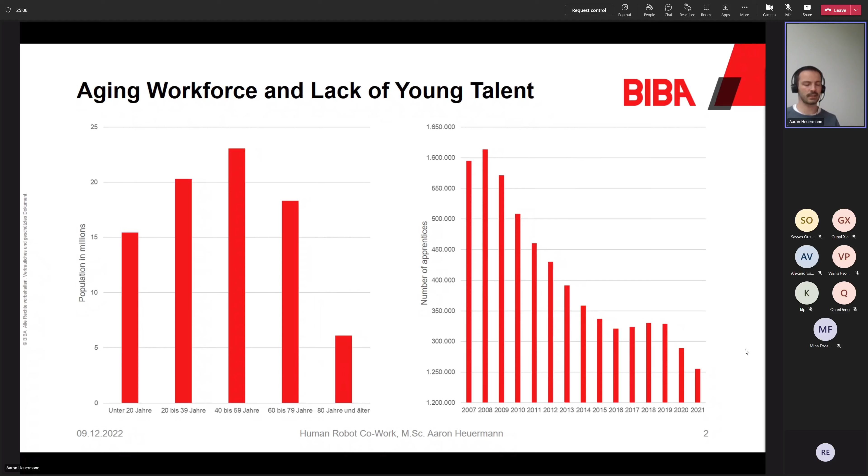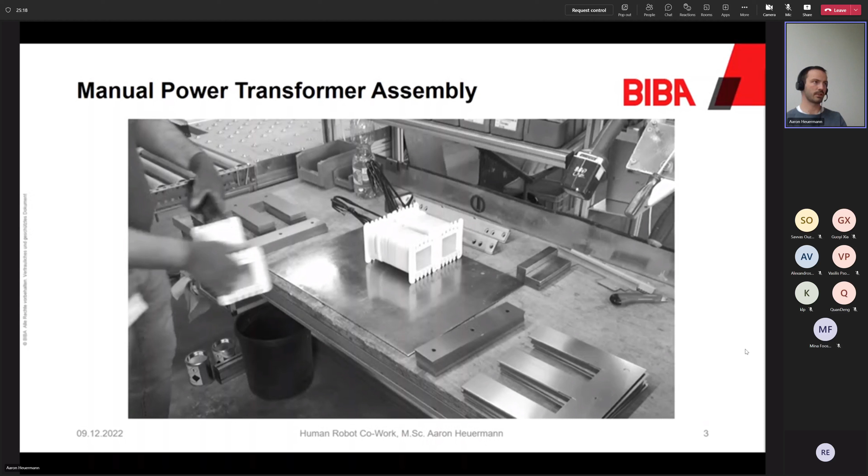I will show you a small example of a manual workplace for power transformer assembly. You can see the worker lifting white coils from a pallet up to a work table. One of these coils weighs around 10 kilograms, and afterward the human starts putting sheets inside these coils from left and right iteratively.

The worker has to count always 3 sheets for each side. This job is very boring but also challenging, because you have to count the right number of sheets, and the tolerances between the coils and the sheets are very small, making it hard to automate this job right now. As mentioned, one of these coils weighs around 10 kilograms, and the sheets filled into the coils have a total weight of up to 60 or 70 kilograms.

So one finally assembled power transformer has a total weight of around 100 kilograms, and this heavy weight has to be handled by the worker manually. The worker has to rotate the final product to make some adjustments, and hammering some further sheets inside the coils to make it completely full. This is a task which is also not very easy to automate.

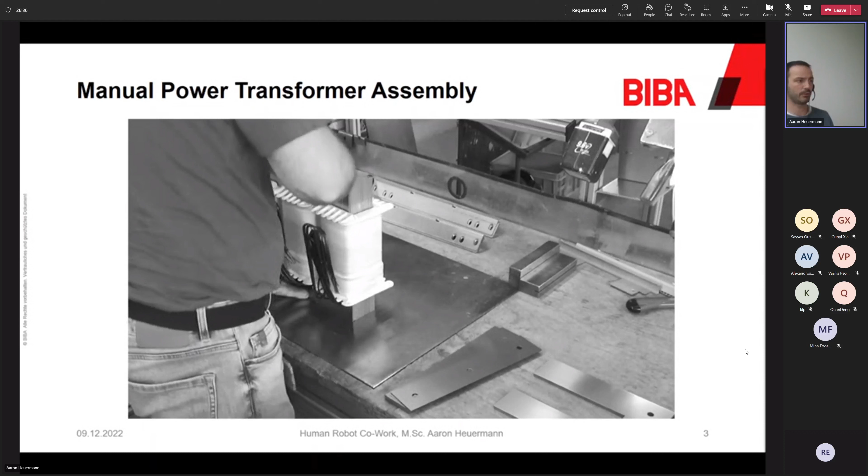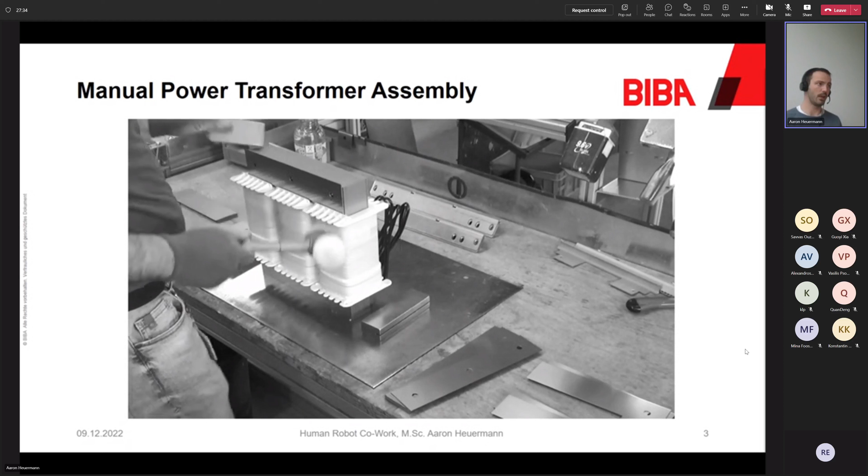In this use case, you can see that on the one hand, we need to support workers, because if they don't have to handle that heavy weight during the job, they stay healthy, they can do their job longer, and don't start with retirement early. On the other hand, there are jobs which can't be automated completely right now. This is the motivation to combine the skills of humans with the skills of robots.

And this is what we call human-robot co-work. Humans and robots work together in production processes, flexibly sharing tasks and contributing their respective skills. As you can see in the strength and weakness table in the lower part, the weaknesses of the human: limited power, fatigue; the strengths of the robot: payload capacity, continuous operation, repeatability, and so on. So human and robot are a good combination.

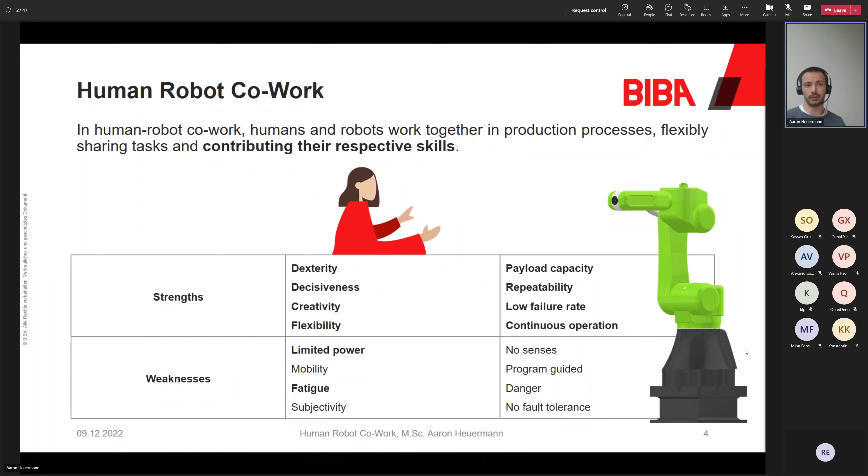This current trend is also often in the newspapers. We see titles in the newspapers like 'Colleague Robot,' 'Human and Machine as a Team,' 'Robot Becomes a Partner,' and so on. But to make this vision realistic, some requirements have to be fulfilled.

One requirement is safety. So the robot needs to be safe and must not hurt the human. On the other hand, the robot needs to have capabilities in the field of perception, cognition, and interaction to allow such close interactions between humans and robots.

And we redesigned the process you saw earlier to a collaborative one. So now the robot is putting the coils on the workbench, and the human doesn't have to lift it manually. The robot is counting the sheets and provides them sequentially on the left and on the right side. The human has to take the final counted sheets, and in the last step, the robot is handing over some further components directly to the human's hand.

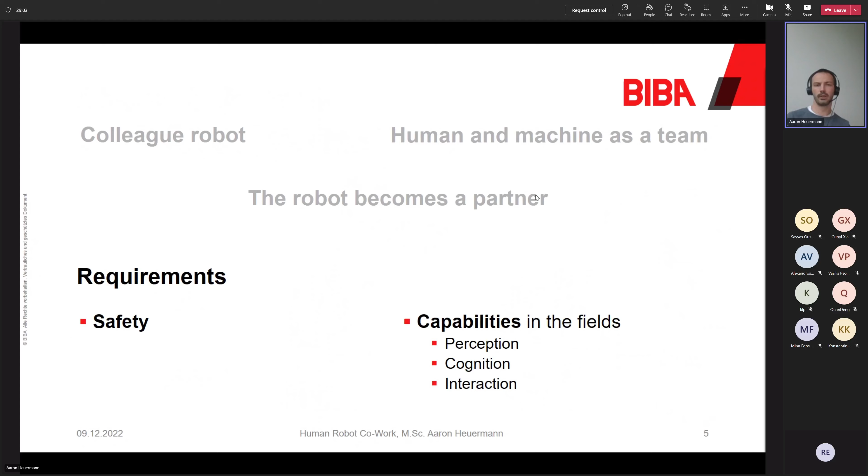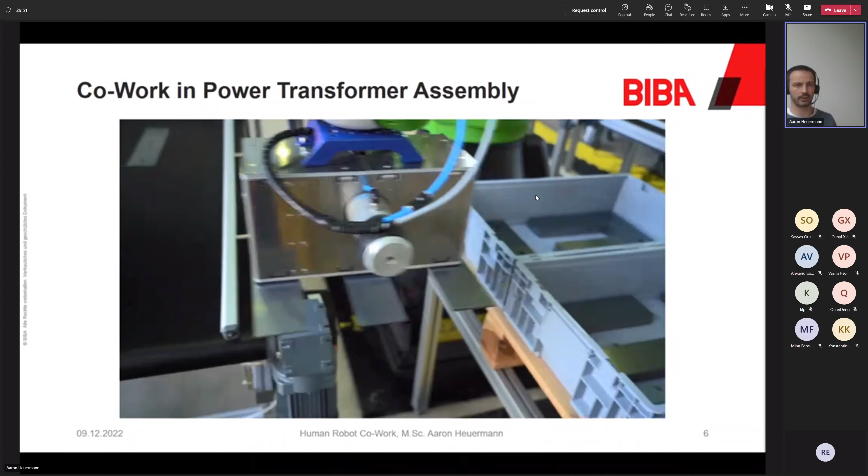By this redesign, the process is much more ergonomic for the human, as the human doesn't have to handle these weights very often. Also, the annoying task of counting the sheets is removed.

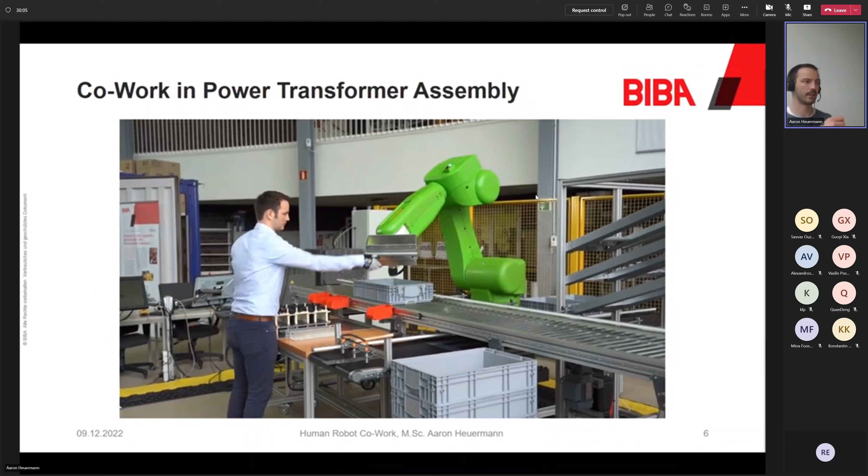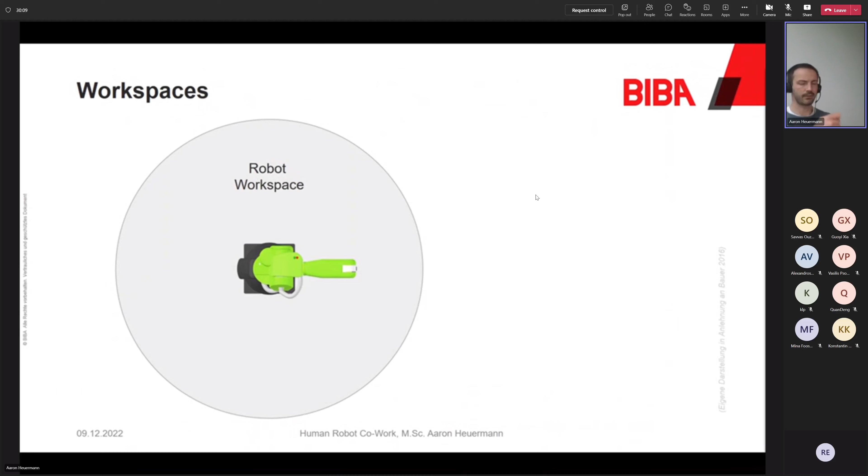But let's have a closer look at this use case, and therefore we need to know about the different workspaces. There's a workspace in which the robot operates, there's a workspace of the human, and of course there's a shared workspace in which both the human and the robot can do some tasks. This is necessary to differentiate between different interaction levels of human-robot co-work.

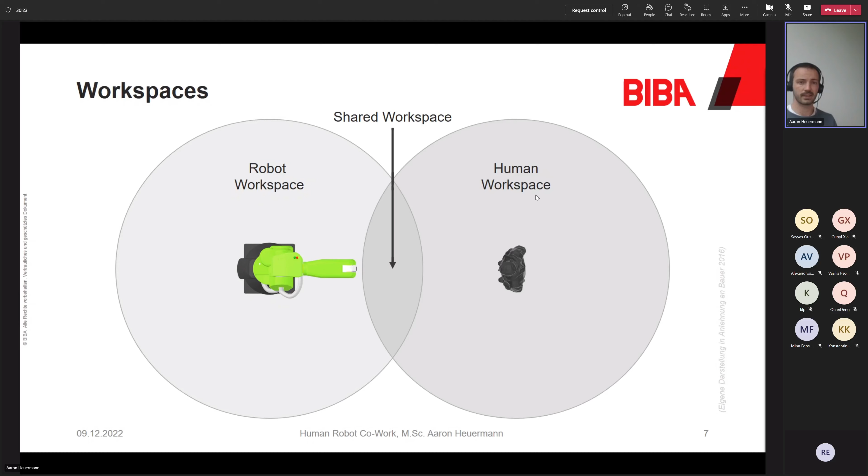The next interaction level is cooperation, and that is the situation when the robot is providing, for example, the coils on the work table. The robot puts the coil on the work table, and after the robot releases the coil and moves away, I, as a worker, take the coil and do something else with it. So that's a sequential cooperation.

And this is collaboration. All these different types of interaction can be tracked using software. So we are able to receive the robot data, and we can track the human, for example, with a locating system.

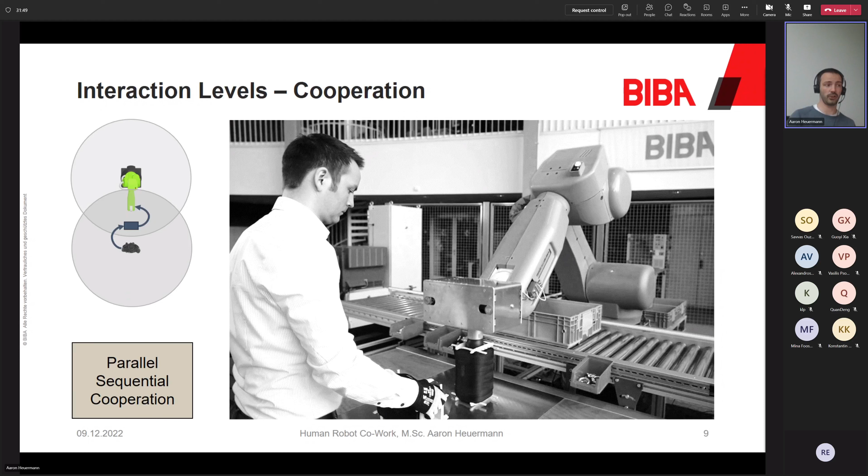We can use this data to automatically identify the current interaction level and adapt the robot behavior according to this.

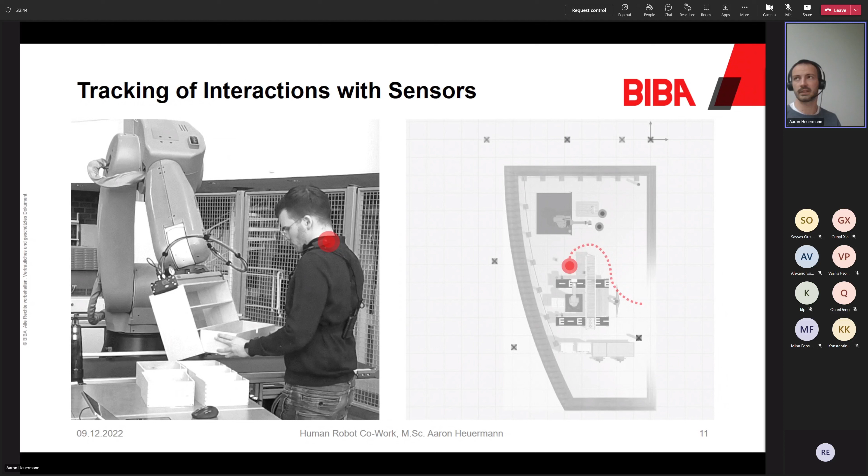I mentioned at the beginning of this presentation that I want to talk about human-robot co-work instead of human-robot collaboration, because I think nowadays too often human-robot collaboration is the topic, but most people actually talk about human-robot co-work.

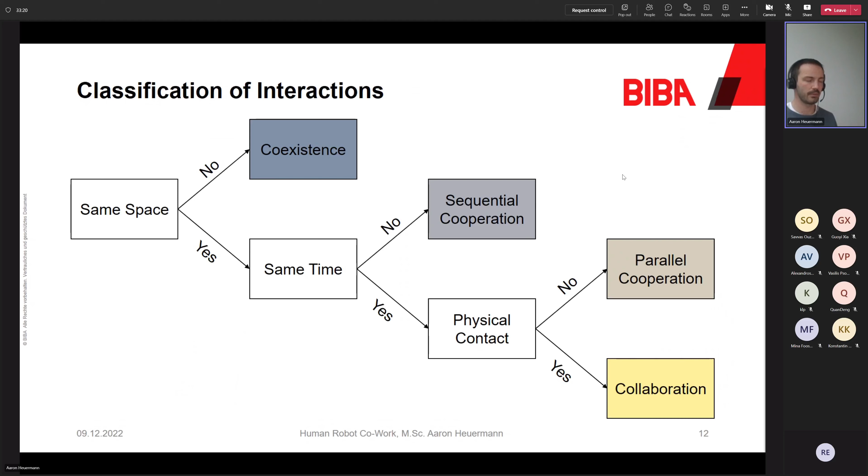So during an entire human-robot co-work, collaboration is just a small piece inside this. Collaboration consists of just episodes during work days, and that's why I think we have to talk more about human-robot co-work and less about human-robot collaboration.

I talked a lot about interaction and recognition until now, and mentioned there's a different requirement which enables this, and this is safety.

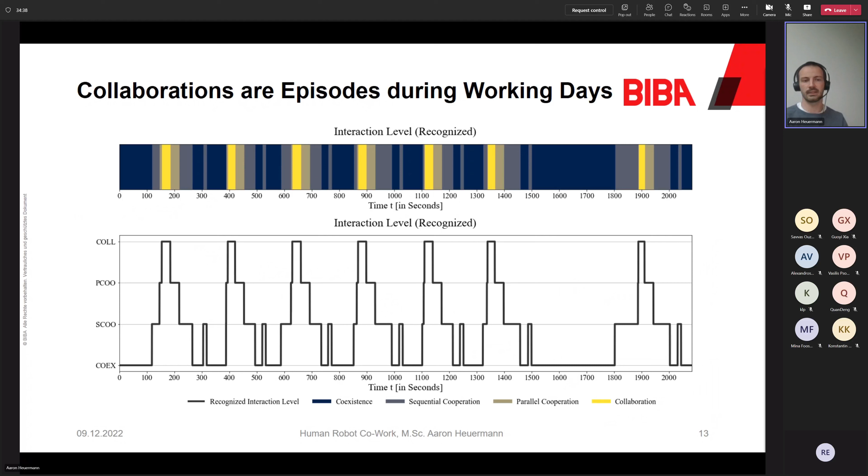Nowadays there are many collaborative robots on the market which work with the principle of force limiting, which means the robot measures an external force, and if there's a contact with an object or with a human, the robot stops automatically.

This is what creates the safety for the human, because this contact is not hard enough to hurt the human. It's like a small push when you get in contact with another person in a tram, for example.

Beside this very popular principle of power and force limiting to enable safety, there's another principle called speed and separation monitoring. In this principle, you continuously observe the distance between human and robot and calculate the minimum distance.

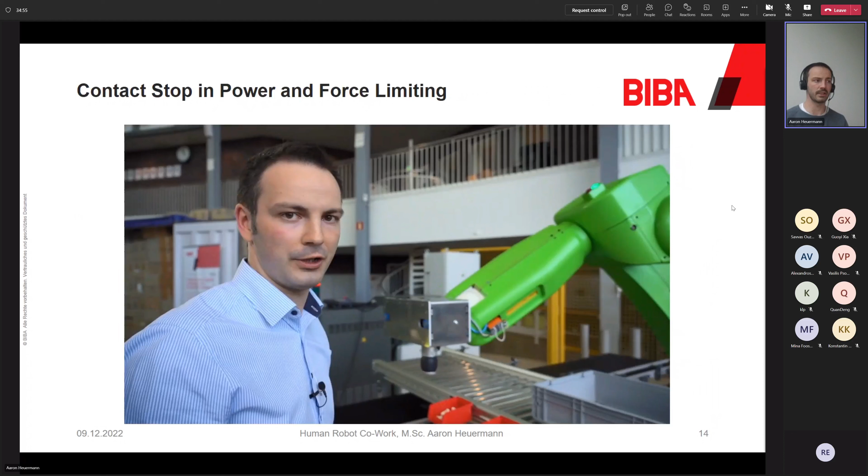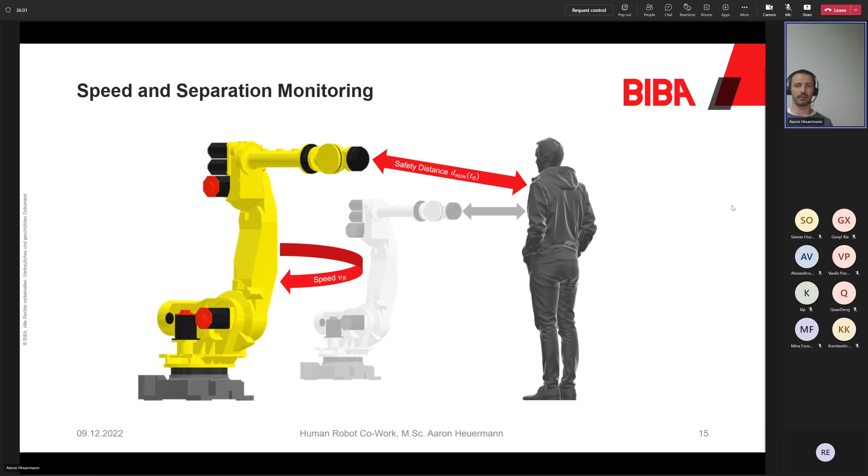We did a lot of research in that field at BIBA, and probably Coral will tell you something about that as well. We developed a wearable sensor system at BIBA, which has fibers attached to the work cloth.

We use this to have a real-time digital twin of the human pose, and that data can be used to calculate the distance and then control the robot speed.

When we attach such a sensor system to the human, we can't only use it to create safety. We can use the same data also for ergonomic analysis, for example.

So we know if the human bent over and had to lift some heavy part from a very unergonomic position, and so on.

So there are multiple benefits of such wearable sensor systems, not only creating safety in human-robot collaboration.

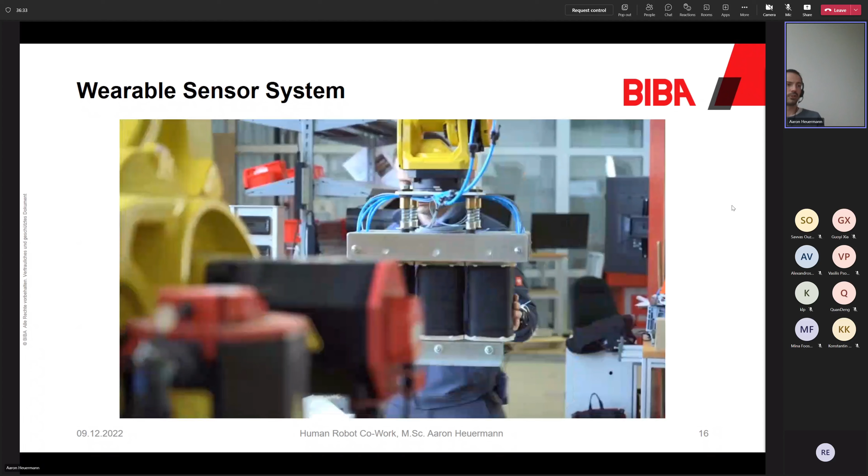That was my short introduction into that field, and I hope you learned something new. I'm open for your questions, or I'll hand it over to Coral again.

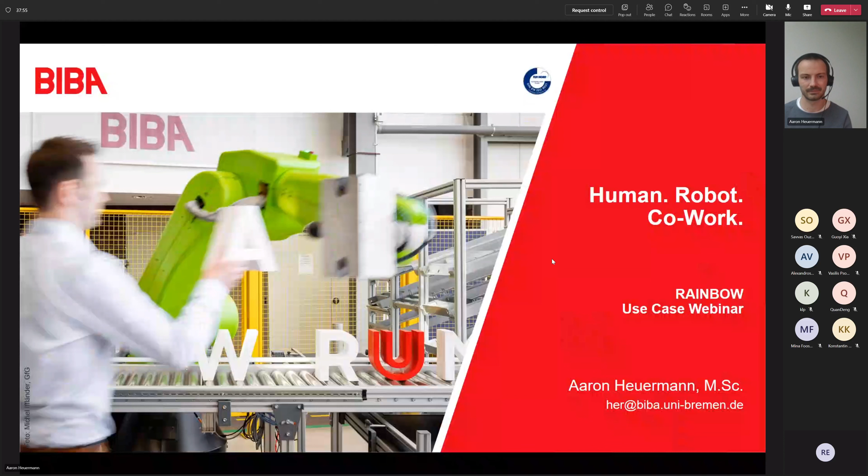Thank you very much, Aaron. It was really interesting and a great introduction for what human-robot collaboration, or co-work as you said, is, and what collaboration is inside this co-work. It was really interesting to see how a robot can work together with a human.